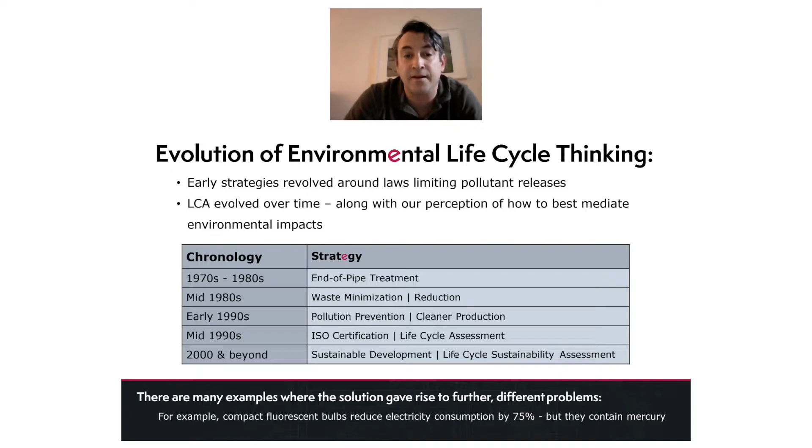So a great example of unintended consequences is the greenhouse gas emission trends we see with building construction in Canada over the last several years. So between 2014 and 2018, buildings contributed nearly 12% more emissions than they did a few years ago. So this means that despite using certified forest products or sustainable lumber practices or other technological advances, buildings are producing more greenhouse gases. And it's largely due to these large housing booms we see in large cities that have condos and townhouses that are being built to this minimum performance standard.

We know there are emerging building codes that are likely to push builders to adapt, but for the builder, they need to know how can they maximize performance but still maintain that bottom line? You know, should you focus on green technology? Should I simply insulate and wrap tighter? This is where I think a life cycle perspective can help make those decisions easier.

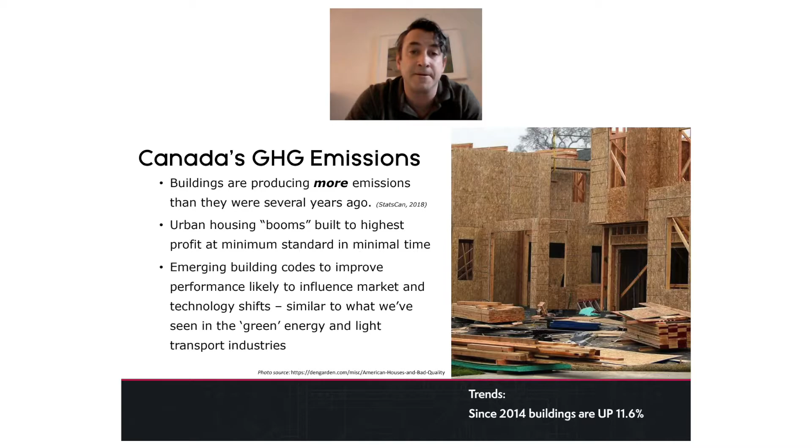So when we look at the construction industry, it's traditionally focused just on the environmental impacts around materials used in construction and the construction process itself. There's been some attention paid to site preparation, especially if you're dealing with older trees or environmentally sensitive areas, but not in the context of minimizing soil and tree root disturbance.

So only recently are we really starting to understand ongoing operation impacts, and there's almost no discussion about what those impacts are when a building no longer is serviceable. You know, what's the end use impacts of these buildings? And this is really important to consider because if we want to approach a real net zero home build, it needs to consider the whole supply chain. And it needs to include estimates of how long that building is going to last too.

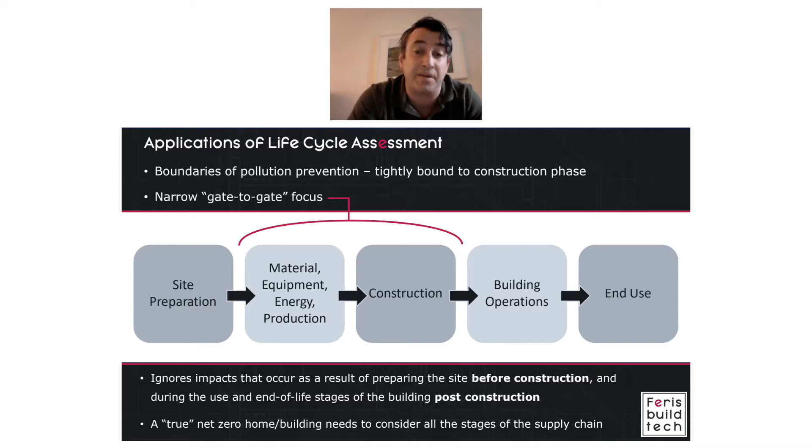So to quickly touch on net zero standards, what we know is that, based on the majority of our current building designs, most of the emissions of buildings are going to be ongoing. So even if you use the most sustainable building materials available, after 100 years of operations, the emission savings from materials and construction decisions are slowly overshadowed by these cumulative emissions associated with the operations of that building.

Because if we do a quick calculation of what it would look like at a national level, we would see that a net zero performance standard alone could save Canada about 30 megatons of carbon by 2050. It could easily double with retrofits, and just imagine what those savings could be like from a life cycle perspective if we started to include minimizing impacts for things like end use, the materials used, site preparation. So reducing impacts at every life cycle stage can have a real meaningful impact.

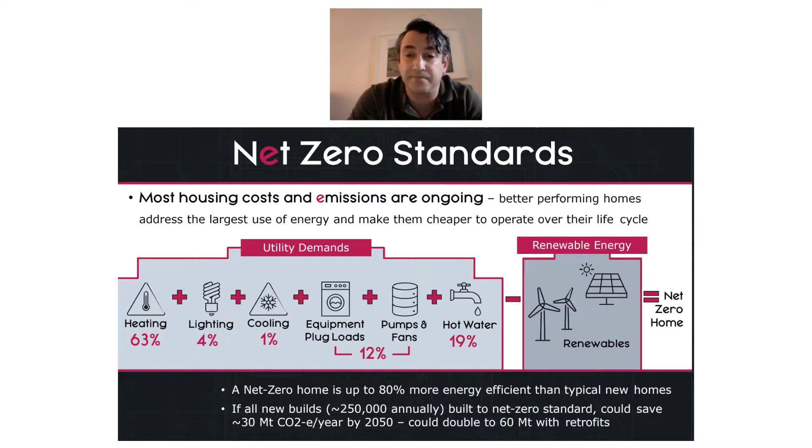So in that context, what I really want to talk about right now is a really interesting research project that I've had the opportunity to be involved with over the last year and a half. And that is about a life cycle assessment building project that I partnered with Feris Build Tech on. It's a small home project that was built using minimal heavy equipment. A skid steer shaved off a few feet of soil. That was about all we used. The rest was assembled by hand.

It uses primarily only two building materials, EPS and steel. The EPS provides insulation, a vapor barrier, and it's the structure, which is really important. The steel is there primarily as the structure, but it doesn't penetrate the wall, so there's no thermal bridging. So the walls, the floor, and the roof end up being assembled as these modular pieces that weigh about a third the weight of a wood frame of the same dimensions.

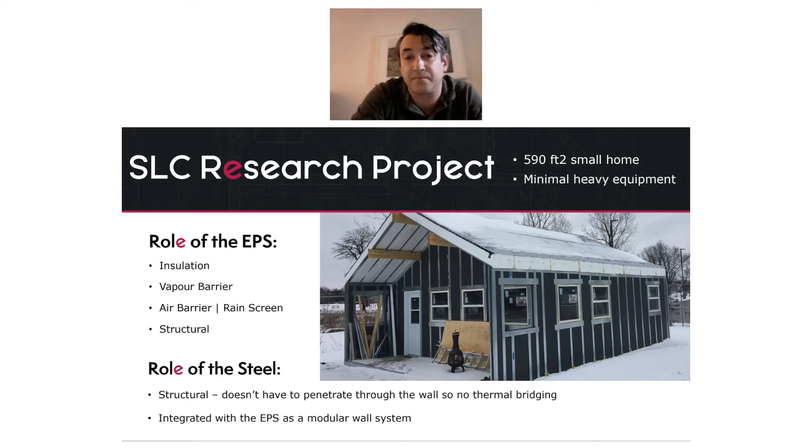And the result of this reduced thermal bridging is really significant. So based on early thermal tests, the Feris walls were 80% more efficient than their wood frame counterparts, even though they were a third the weight. They were stronger than the wood based on load tests, and they passed the 1-hour fire test used by Feris because the EPS that they used won't hold a flame.

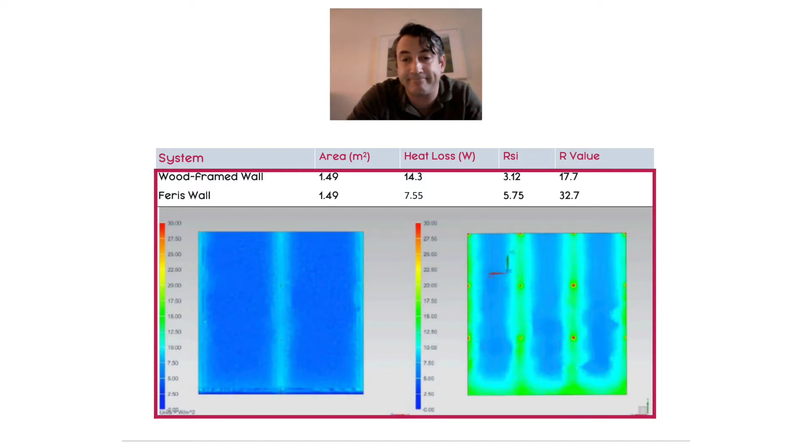But one of the things we also want to look at isn't just these thermal performances that might be associated with just a net zero. We also want to look at what are the other life cycle considerations when it comes to maximizing or minimizing impacts and emissions over the life of that building. So in addition to the thermal performance, there's a host of other performance metrics we think are realized with this type of building technology.

So in addition to the exceptional thermal performance, we think the risk of mold and mildew is mitigated. It doesn't hold the moisture like wood does. It's insect, pest and rodent resistant. Because of that mold resistance, there's improved indoor air quality. The EPS is also cured off-site, so there's none of that curing you associate with spray foam. The minimal site disturbance, we talked about the reduced equipment we use, but we'll talk a bit more about that.

The components, the steel and EPS, are 100% recyclable. So think about the end use impacts. We can now take that and turn it into something else. When we look at the CAD manufacturing process for this type of technology, in the build that we were looking at at St. Lawrence College, we would come away with basically a small shopping bag of waste for a 600 square foot building.

The expected life cycle of EPS is long, with some 500 years in landfills. So we expect that compared to traditional builds, these are going to last at least twice as long. And we think that there's a really important aspect about climate change resiliency, things that can withstand floods and hurricanes and fire and mold and pests. And this technology is really interesting. So when we finish the LCA, hopefully this June, I think these are really interesting results to look at.

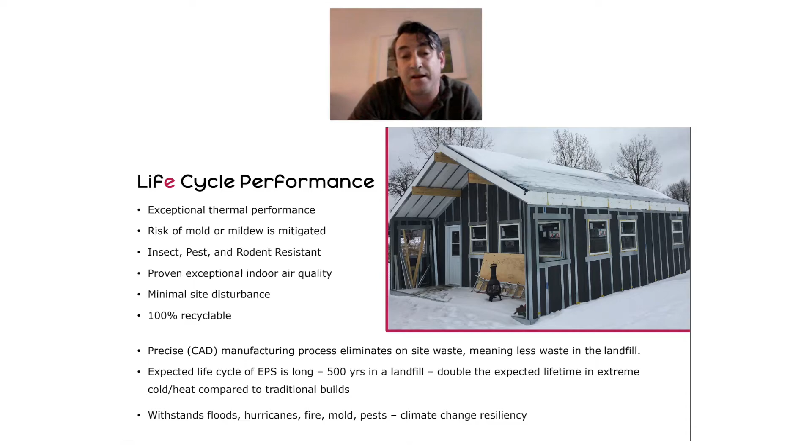One of the things I want to quickly talk about in terms of minimal site disturbance is the impact to trees. I also sit on the executive board of the Ontario Woodlot Association and do a lot of research with trees and urban trees. And the first thing I understand is that urban trees are stressed, and they're stressed from things like air pollution, but they're also stressed from things like access to nutrients. As soon as we cover them up with pavement and concrete, we reduce the infiltration capacity of the rain. That limits the water and nutrients that can travel to the roots.

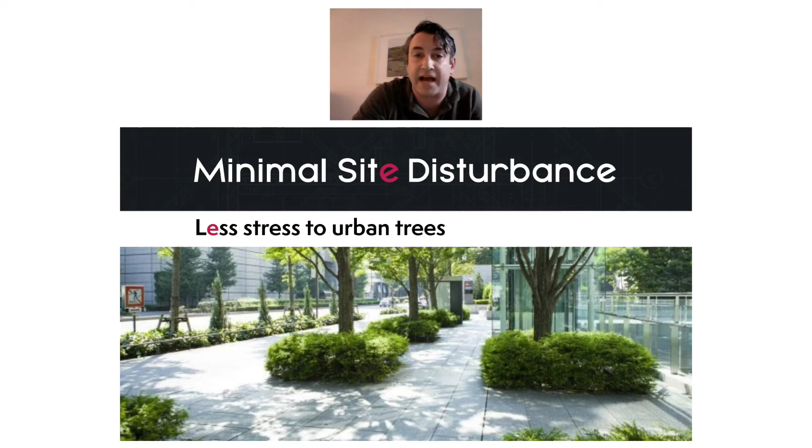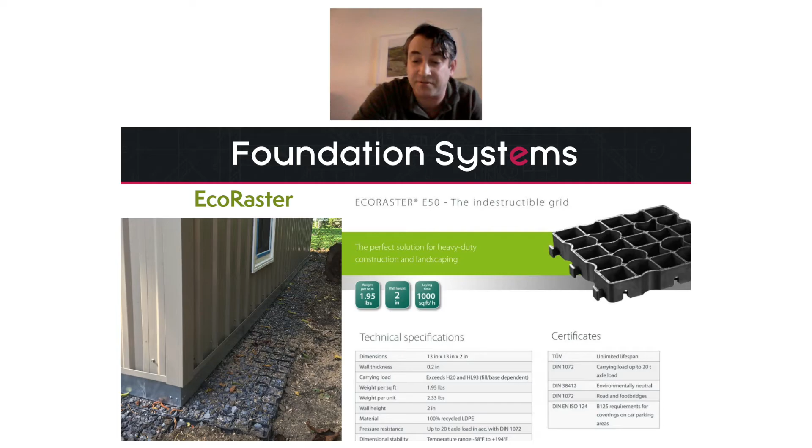So one of the interesting foundations we use with the Ferris project is a product called Ecoraster. It's a plastic modular soil insert at the surface, goes down a few inches, needs minimal excavation. And the result is this little pad that we use minimal fossil fuels to create. The water can flow both horizontally and vertically through the foundation. And this is a really interesting thing that can be used for the lightweight design of Ferris's walls.

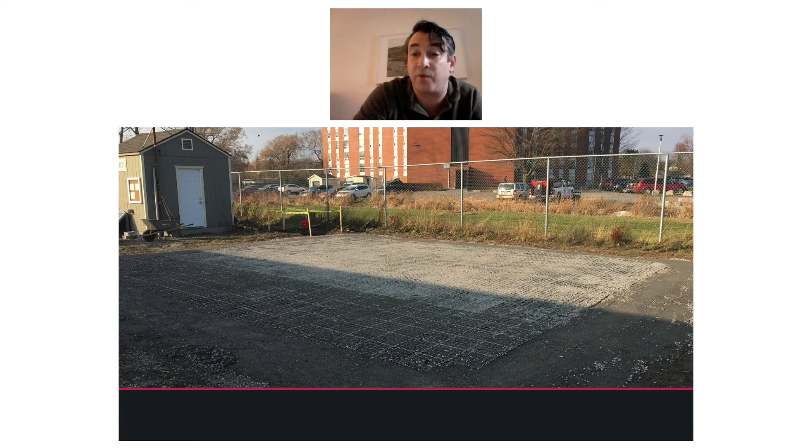So some of the takeaways from today, I hope that sticks with everyone, is that by using LCA, it can help us understand how to make a building more efficient, how to make it last longer, and have minimal impact on existing sites. Other assessments usually focus on one or a few steps, and we need to be focusing on all of them. The second thing is, as we shift this paradigm about how we build things, we need government and public support. LCAs can be a tool to help facilitate those discussions more objectively.

The third is that I really want to emphasize there's no single appropriate way to build a sustainable building. There's lots of different ways, and we need to start telling people that, because LCA is a way that we can start to compare apples to oranges to strawberries when it comes to different building techniques and their performances. And we know there are important environmental impacts other than energy and carbon, like indoor air quality. These are all things that we need to include, because a single net zero approach misses those other impacts.